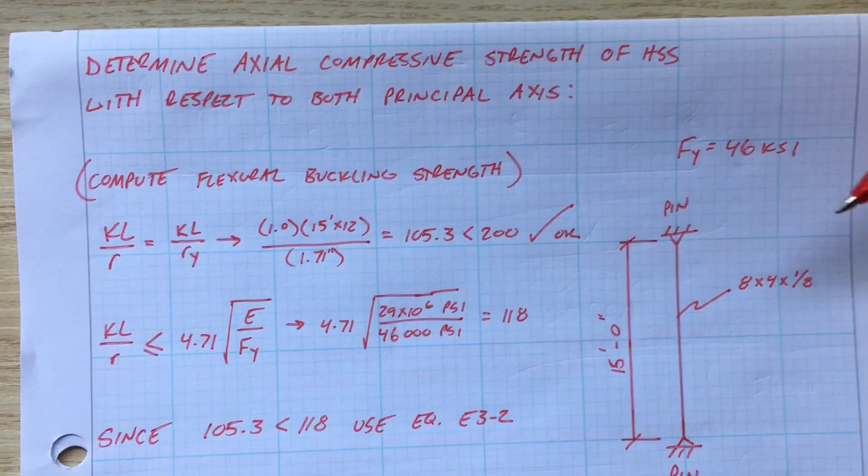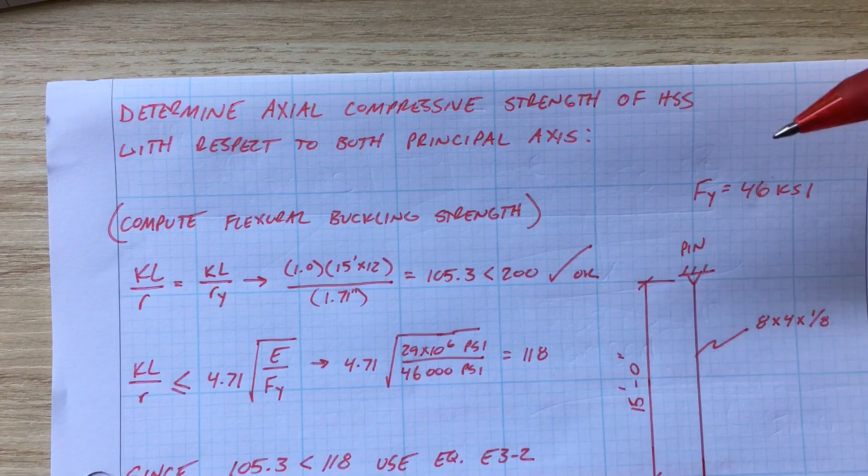So I have not actually supplied a load on this column. Today we're going to compute and determine the axial compressive strength of the HSS with respect to both principal axes, because we have two different cases here: compression about the x-axis, so this way, and compression about the y-axis, so that way. And because its geometry is different in both axes, we need to figure out if that's going to affect our strength.

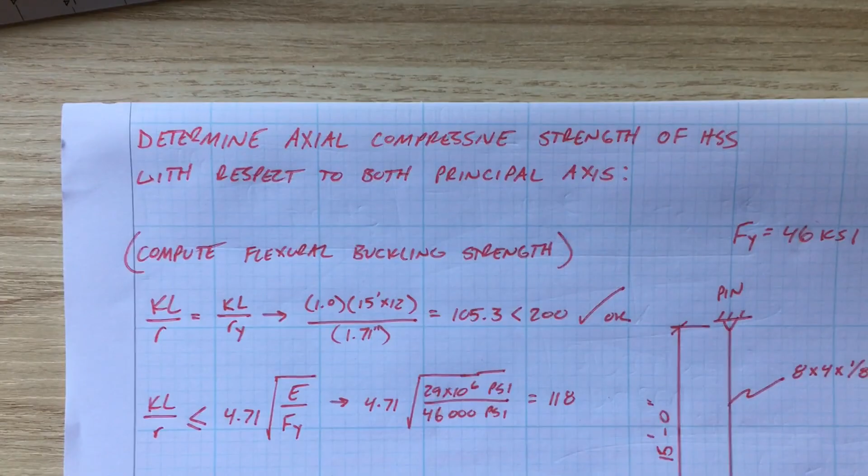So let's get into it. As always, since we're working with steel, you're gonna need your steel manual, the AISC steel manual. I'm going to be working with the 14th edition. The 15th edition is out, it's been out for a little while now, but everything should be just about the same, so you should be able to follow along pretty easily with that one if you have it, so don't fear.

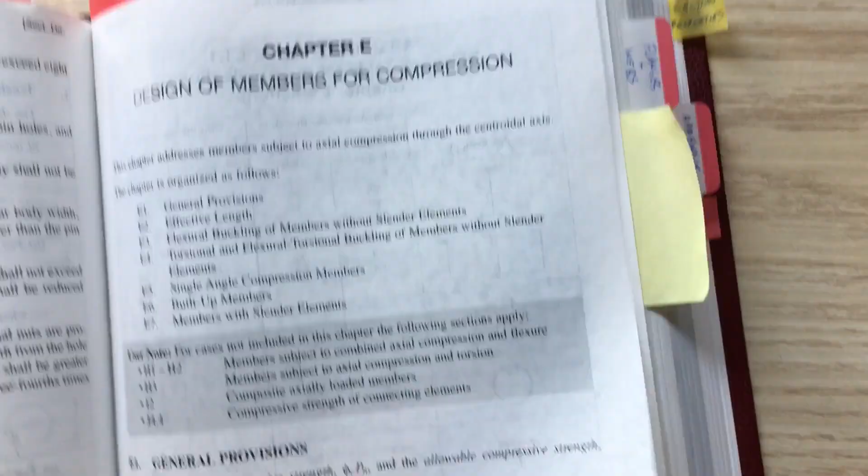All right, so what we want to do first is compute the flexural buckling strength. If you go to Chapter E in your design manual, that's the design of members for compression, and that's what we're doing. So we'll flip to the next page, and this gives us our table, and basically it helps you break down what your section of your column looks like.

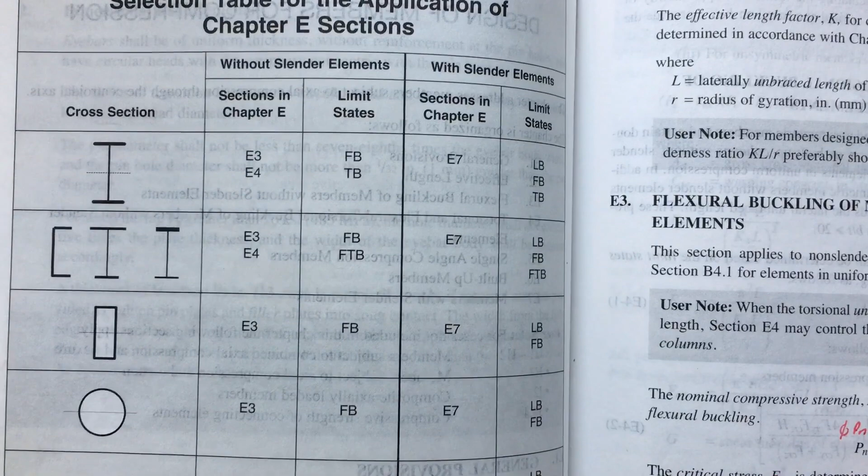And we have this one, a rectangular HSS member, and it gives you a little cheat sheet that tells you what's going to be the limit states. The limit state is the effect that happens that controls the strength of the column, and that's based on the geometry of your column and the effects that happen. That's been found through testing over years and years in laboratories to see what happens with these different types of geometries under different loading configurations.

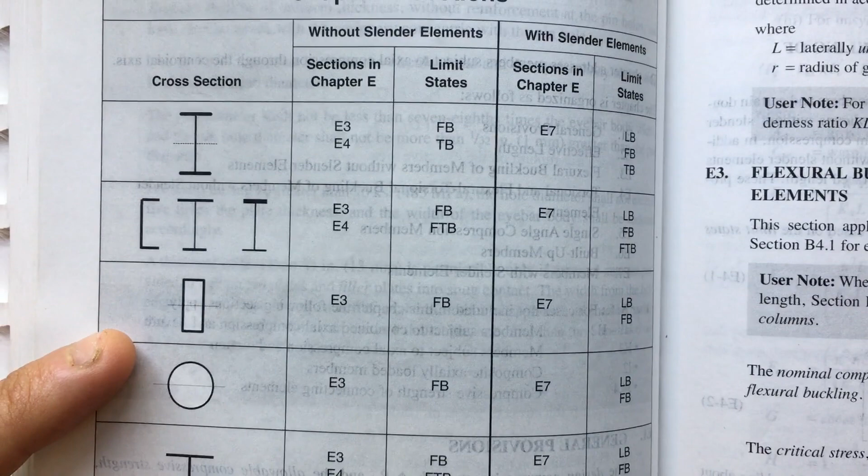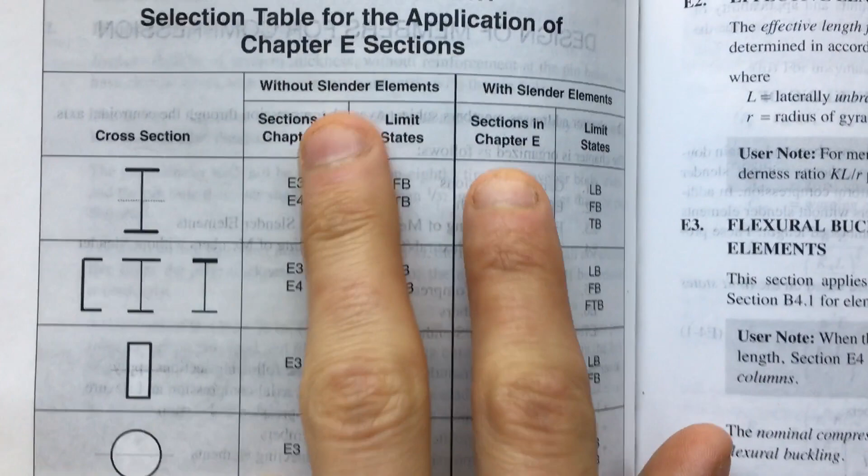But we won't get into that, they've done all that for years and have tabulated it and found the results. So you have two sections here: without slender elements and with slender elements. We're going to jump back to that, we will need to figure out and check to see if our section is slender, but first let's just assume it's not slender.

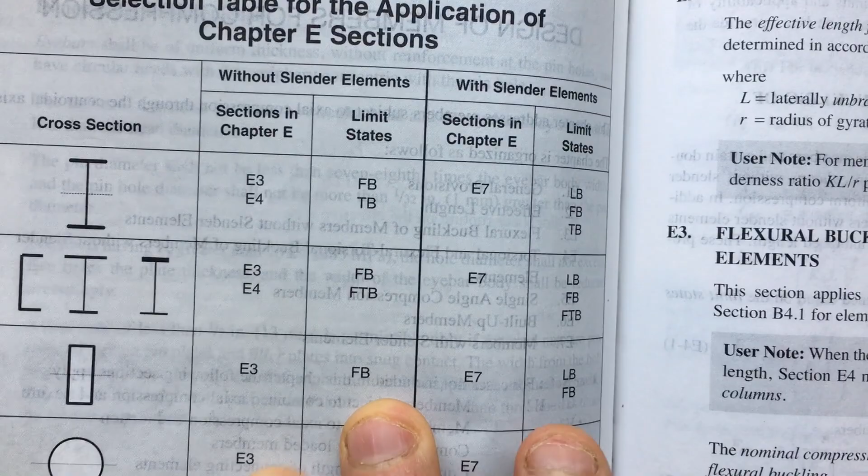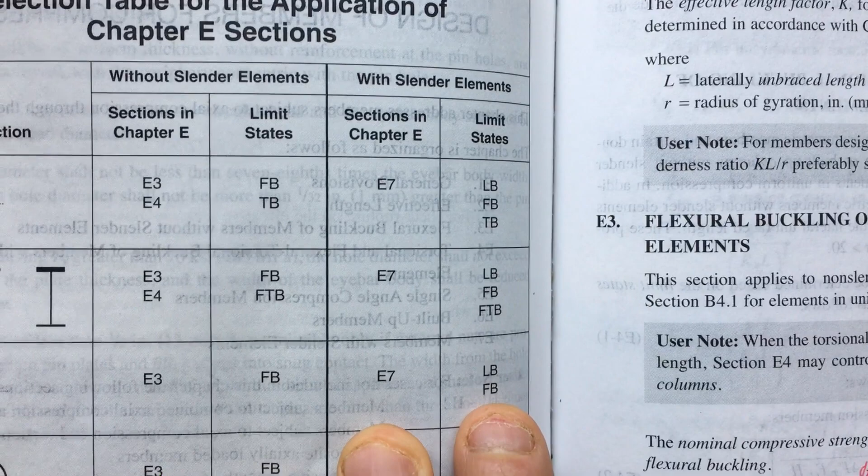So without slender elements, if you look at the limit states in both cases, without slender elements you just have to look up flexural buckling, and with slender elements you have two limit states: flexural buckling and local buckling, FB and LB. So you have FB in both cases regardless. Let's find FB first, since it doesn't really matter if it's slender or not because it's required in both.

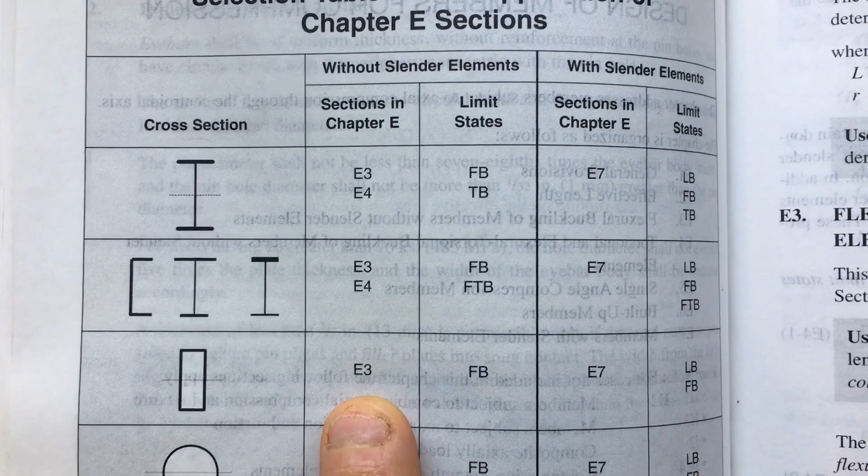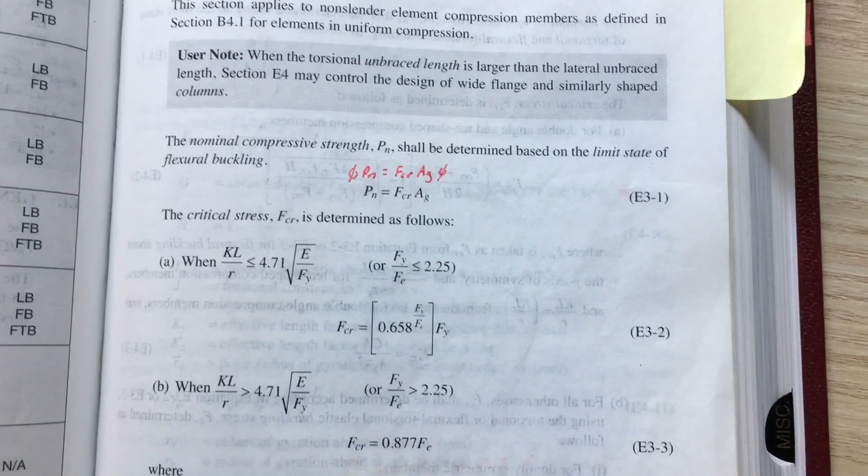And what that does nicely is it tells you what section it's in. So FB, Section E3 within Chapter E. Well this is Chapter E, we'll go to E3, and here we are: Flexural Buckling of Members Without Slender Elements. This runs down and gives you all of your equations that are required, so that's where all of this is located. I'm going to jump back to the page that I have, but that's where all of my equations are coming from. So first we need to start off with KL over R.

And actually, sorry, we're going to flip back.

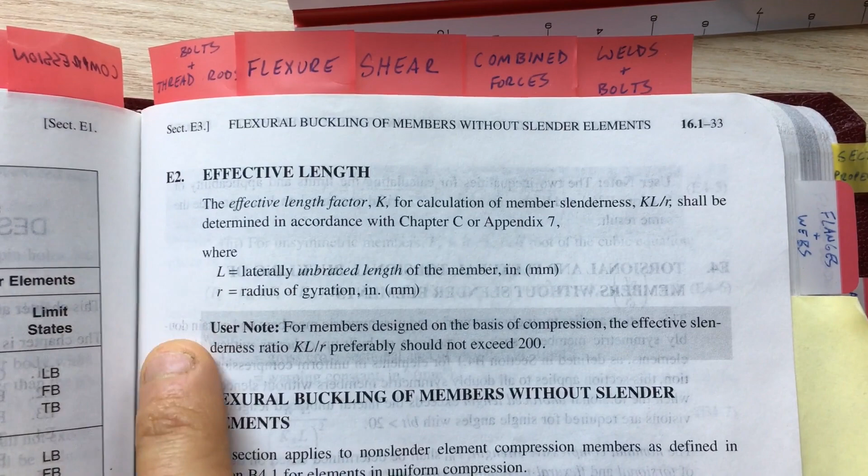That's talking about the effective length section, E2. So you need your K, which is your effective length factor, and you need your L, which is your lateral unbraced length of the member, and then R is your radius of gyration.

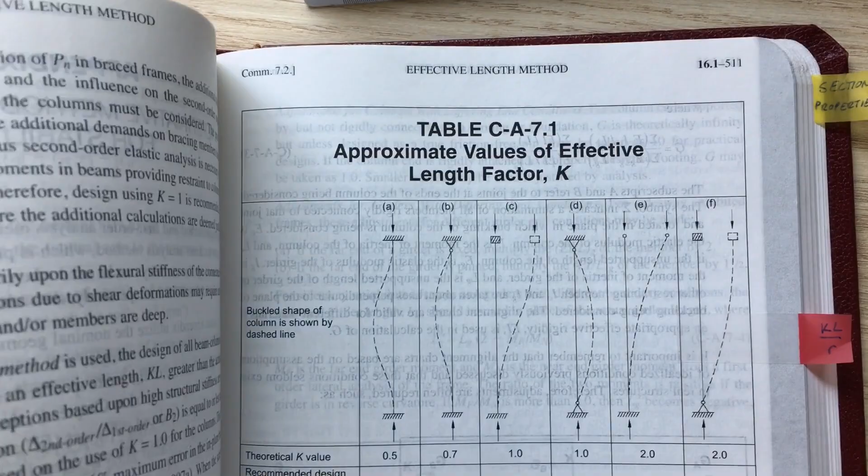If we go to another tabbed section that I have, Appendix 7, for all you future ASCE or AISC steel manual tips and tricks you've seen in my last video, this would be another section of mine. It gives you all the different configurations of what a column is and how it's connected and how it's braced.

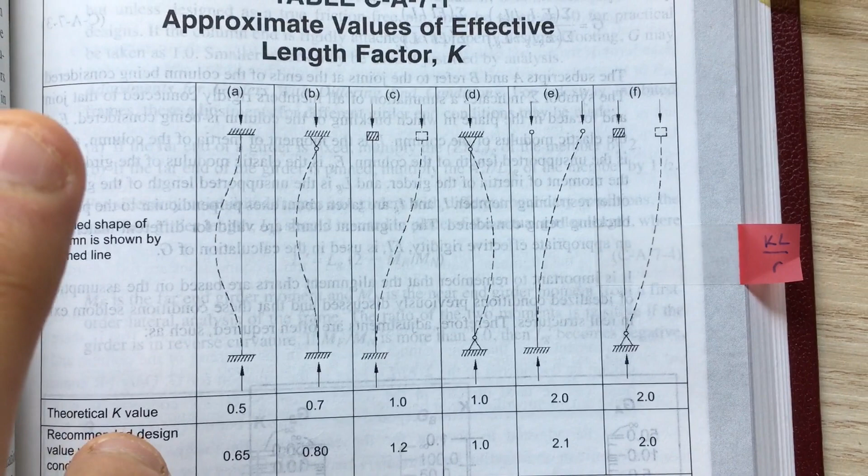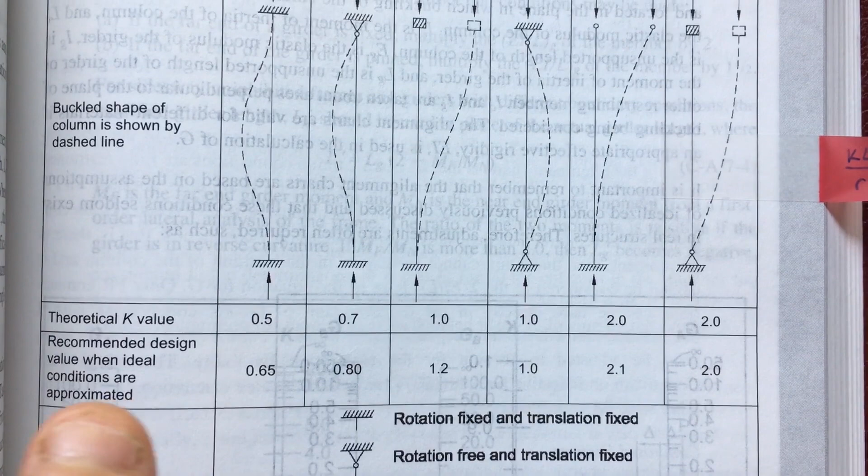It's pretty straightforward in this example. We are just pin to pin, top and bottom, and that means our theoretical K value is 1.0. And what's nice and what we use in typical engineering in the professional world is the recommended design value when ideal conditions are approximated, so it throws a little factor of safety on there. As you can see, it's bumped up slightly.

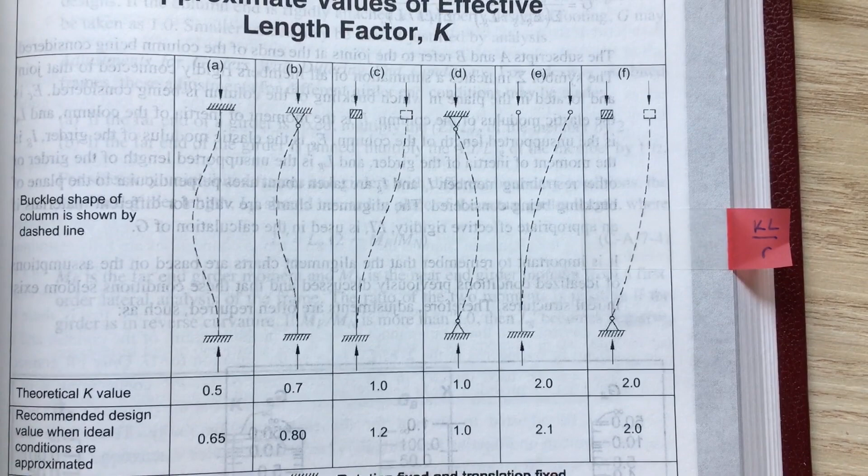What that does is give you a slightly conservative number when you're designing your buildings, just in case everything isn't according to plan. There are other factors taken into account, but I like to think it also accounts for if that beam isn't perfectly set or plumb when constructed and you get some accidental eccentricities in there. This helps account for that so your structure is still safe.

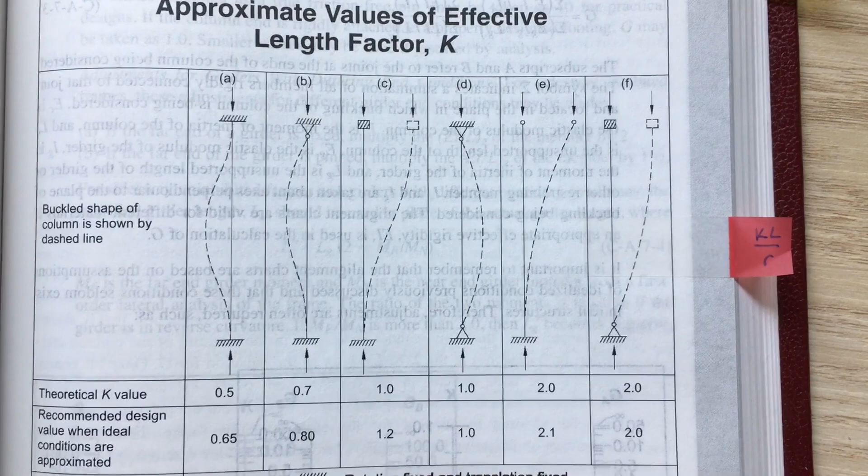But for us today, it's easy. It's section or option D, pinned. So our K is 1.0.

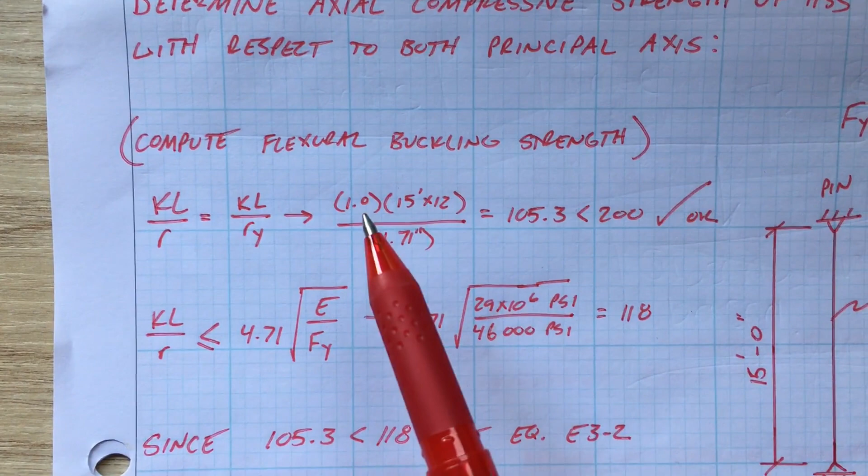So KL over R, we have our K is 1.0. L, if we go over, is 15 feet, that's top to bottom of our column. So 15 feet, we're going to convert that to inches by multiplying by 12.

And then R, we want our least R in this case. What we do is... hang on one second, throw a sticky note in here. This is why, as you can see, we have everything tabbed up the way that I do. Okay, so we need to go back to our section properties.

Let's see how quickly I can do it on the spot. Usually I have it tabbed up for you guys. 8 by 4 by 1/8, and this is in our table 1-11 of all our section properties, and radius of gyration is there.

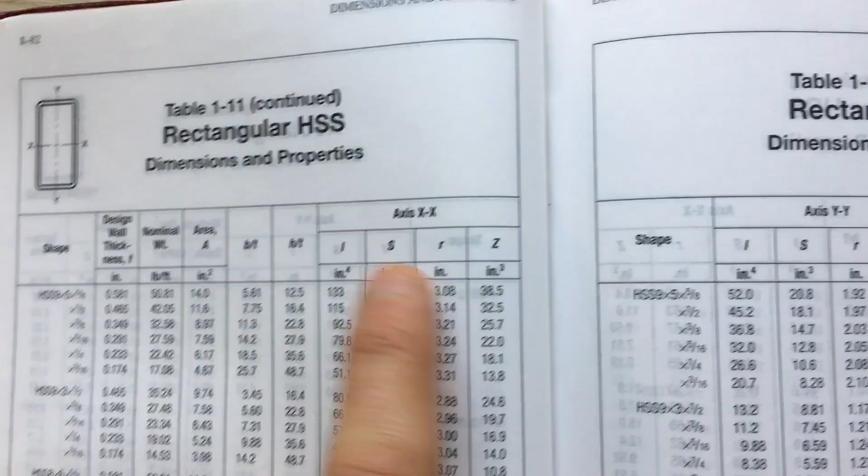So what we're going to need to do is check for both the X and Y direction because it's different. For X, 8 by 4 by 1/8 gives 2.92 for RX. And for RY, it's 1.71. So we're going to use R equals 1.71, that's the least.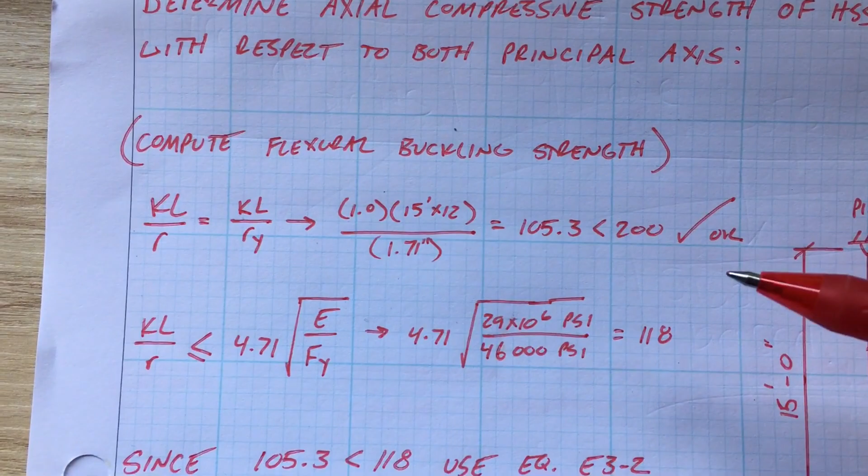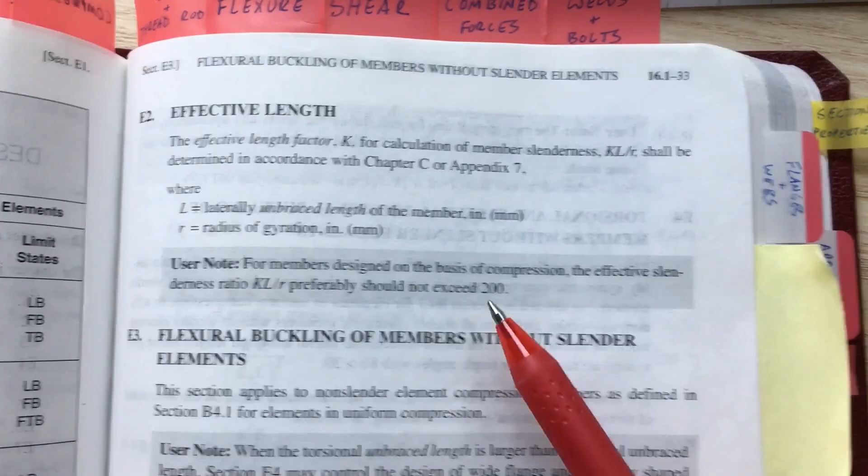Okay, so now we have everything we need. KL over R comes out to equaling 105.3, which is less than 200. You always want to keep it under 200, and that's noted right here in the user's note. It says preferably, but I've never seen an instance where we've allowed something to exceed 200. So that's a first little check, and that's okay.

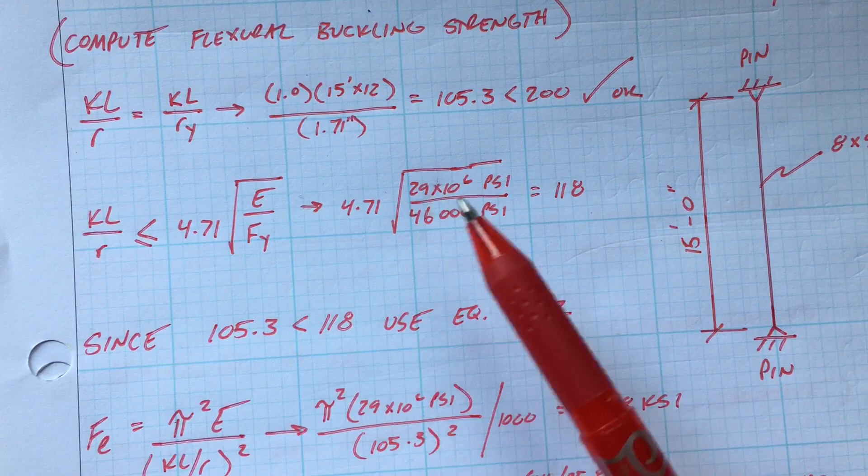So we can move on. Next, we need to check that KL over R is less than or equal to this equation here, and again that's in section E3 for chapter E. We find that E is just 29 times 10 to the 6 PSI, and FY is 46 KSI for rectangular members, so we convert that to PSI. You want to watch your units here, making sure they're both equal. You can use KSI for both or PSI for both, doesn't matter, as long as they're the same. That comes out to equaling 118.

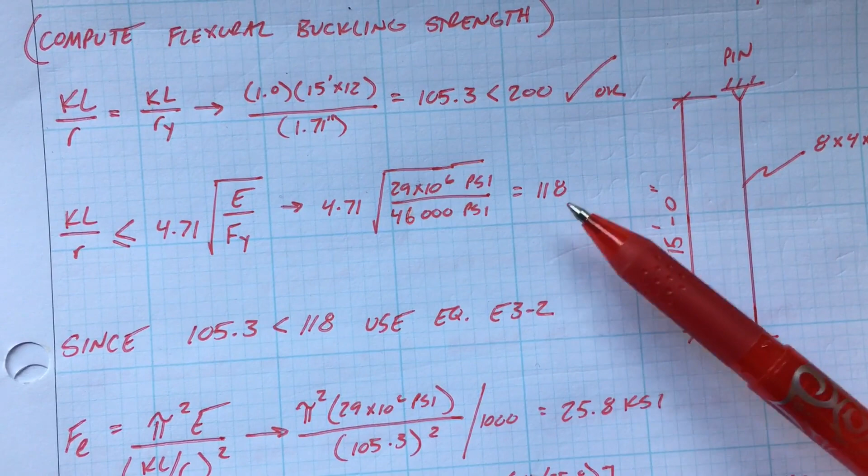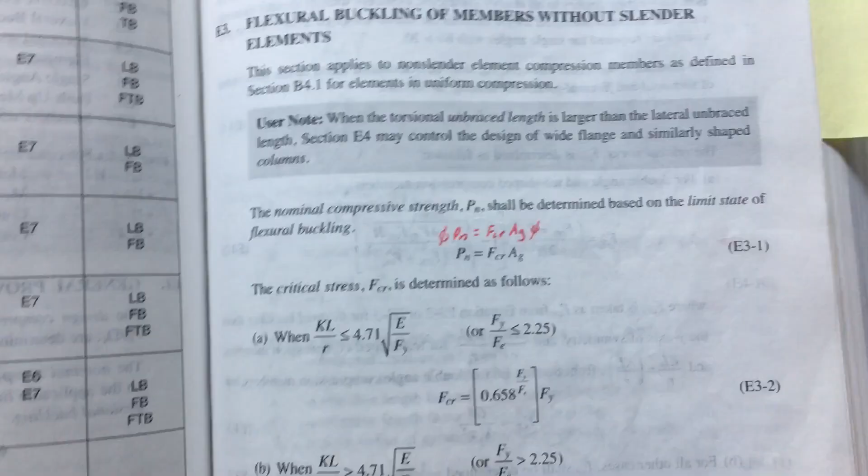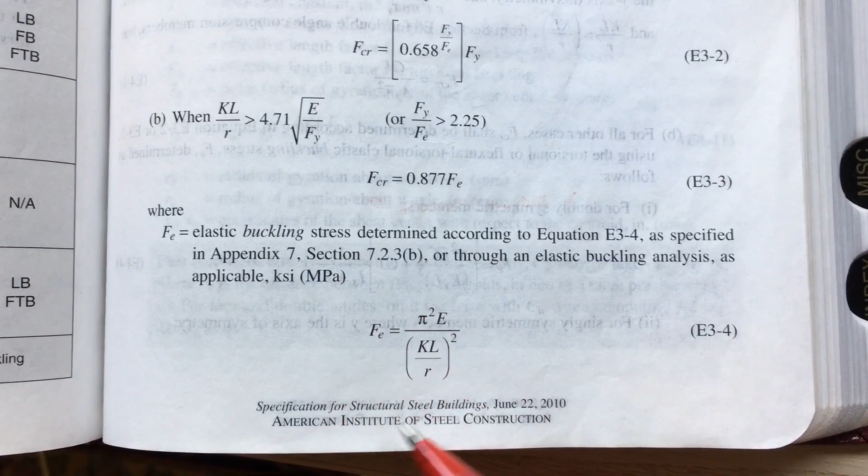Now, since KL over R equals 105 and is less than 118, we get to use equation E3-2. We'll come back to the book, and equation numbers are marked over here. So when this is less than, we get to use F critical, FCR, which equals this equation. But within the equation there's also FE, which we don't know. If we scoot to the bottom, FE is this equation right here. So we find FE first before we can find FCR. I know it's a bit of a process, but we'll get through it.

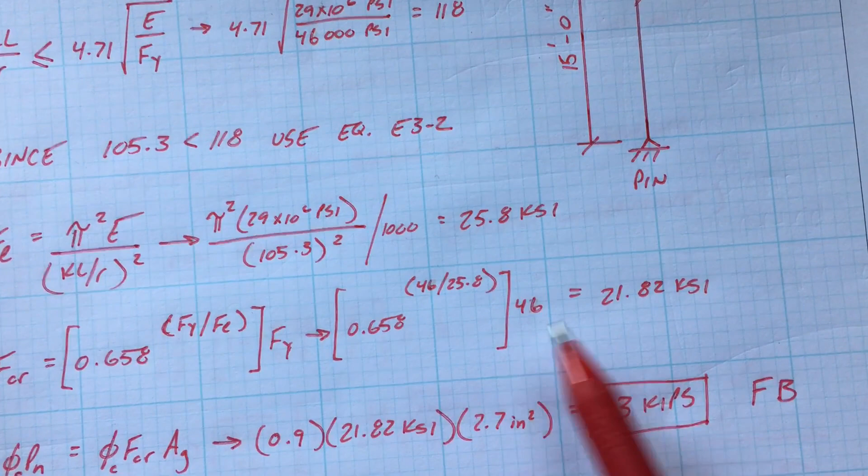So here's our equation, plug everything in, we have all of our knowns. Make sure if you're using PSI, you divide by 1,000 at the end; if you're using KSI, it'll just come out as KSI, that's why I have that there. That equals 25.8 KSI, that's FE. And then FCR is now this equation, and we have everything so we can plug it in. That gets us FCR is 21.82 KSI.

And your compressive strength for flexural buckling is this equation here. Phi PN, I'm assuming LRFD, equals Phi FCR times AG, area gross of the member. Phi for compression is 0.9. So 0.9 times 21.82, that's our FCR, times AG, which you can pull from the material properties, if I can flip to it.

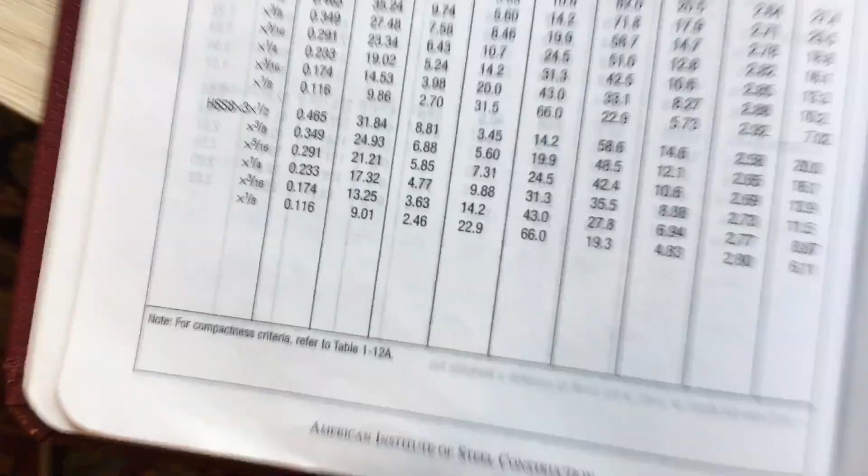So you see area in inches squared, 2.7. Right. Oh, I don't even see my... right there. Okay, we're having technical difficulties here. Hang on, I didn't mark everything accordingly.

Okay, so we have everything, plug all that in. It gets us 53 kips. Remember, watch your units, KSI and inches squared, so kips per inch squared times number of inches squared just gives you kips. 53 kips, that's your flexural buckling strength, factored for LRFD.

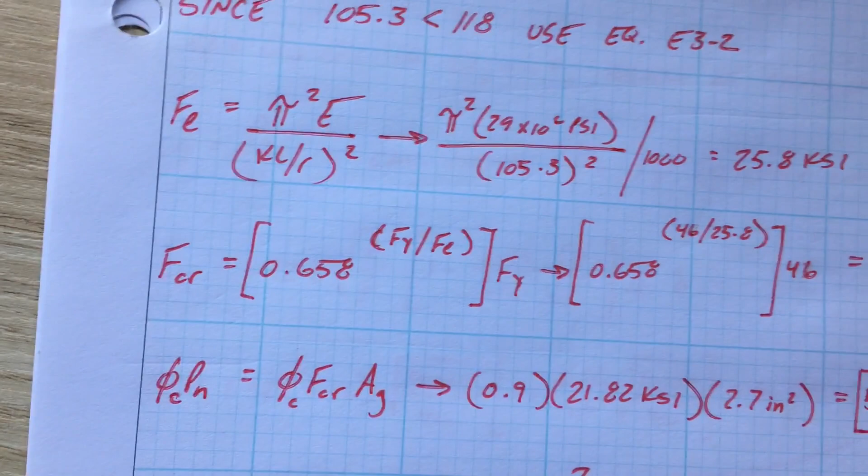So that's the first part. Second part, though, we need to confirm whether our member is slender or not. So is the member slender? What we're going to do is take B over T. We need to find B over T, and we need to find H over T. They're the same thing, just with respect to both principal axes.

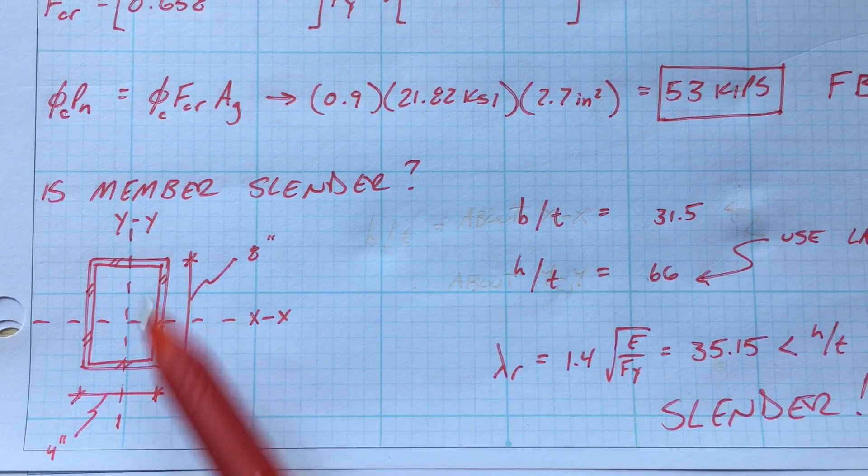Because we said we wanted to check both principal axes for the strength. So one of them is 31.5 and the other one is 66, and you want to use the larger in this case for what's coming next. You can do this by hand, but if you go to the properties table, in table 1-11, they actually have B over T and H over T right here. So just pull them right from there, makes your life a lot easier.

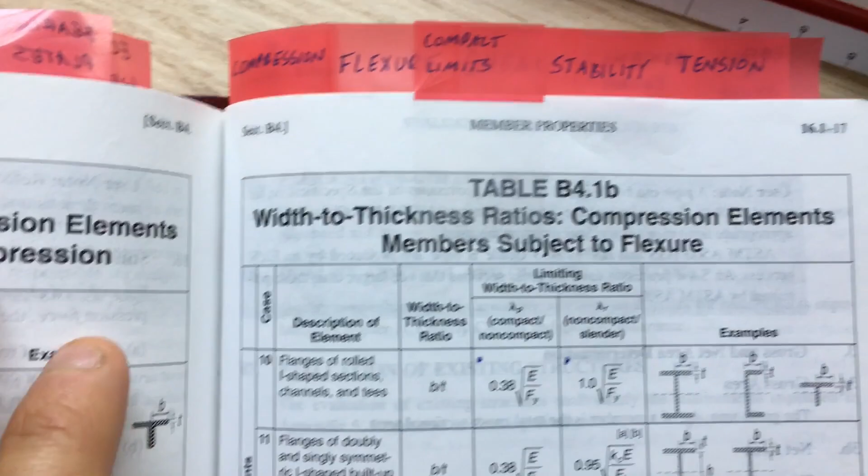What you need to do next—sorry about the camera working, I'm moving a lot—you need to go to table B4.1, A and B. This is your compact limits, and in case you want a page number, there it is. You have two tables here: width to thickness ratios, compression elements, that's what we have. Members subject to axial compression, that's what we're looking at.

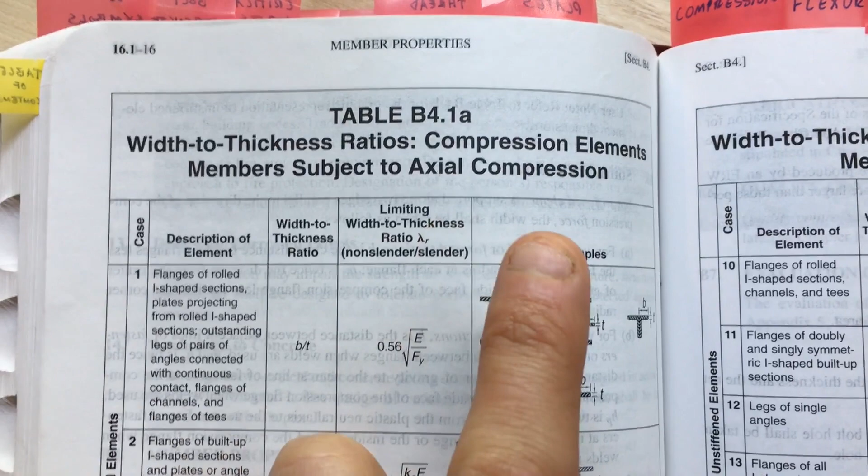The other table is members subject to flexure, so compression elements subject to flexure—we don't have that in this case. We're looking for a compressive strength, so we just want this table. If you go down all of these, you run into option 6, which is going to be an HSS, you can tell by the shape.

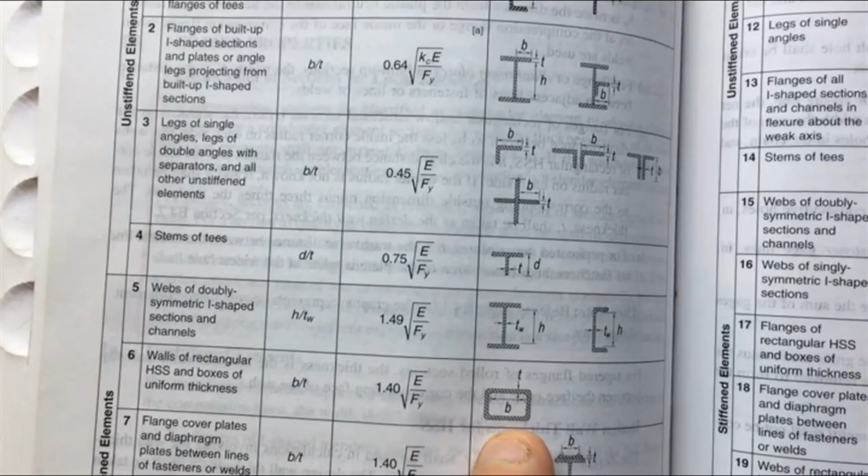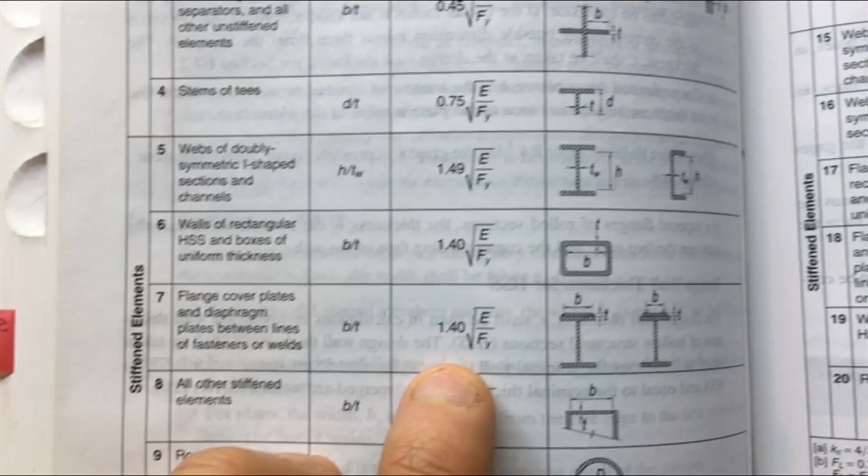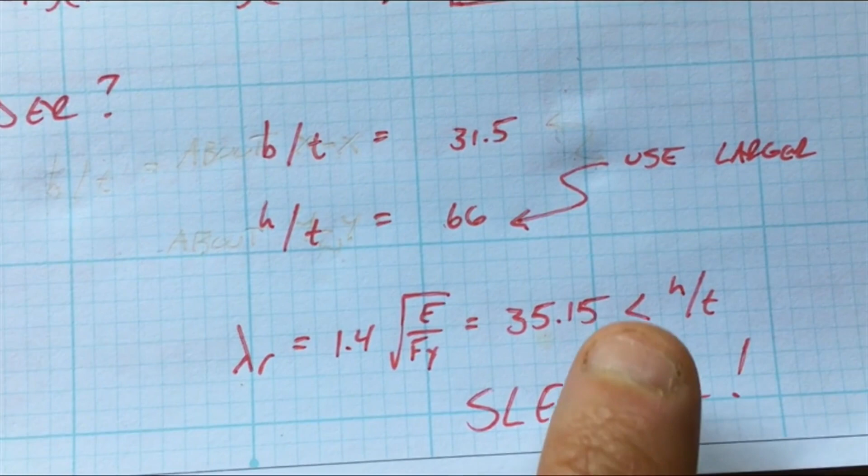So you need to first find B over T for both directions, and that we've done—B over T and H over T—and again, those are both in the properties section. Right there, B over T, H over T. You need to compare them to your lambda R, and for our case that's 1.4 square root E over Fy. We solve for that, gets you 35.15, which is less than, and you want to use the larger value, so less than H over T, which is 66.

So that means we have a slender element. So we have to go find our local buckling capacity. Since H over T is greater than—like I said, the larger dimension element is slender—the local buckling strength must be computed.

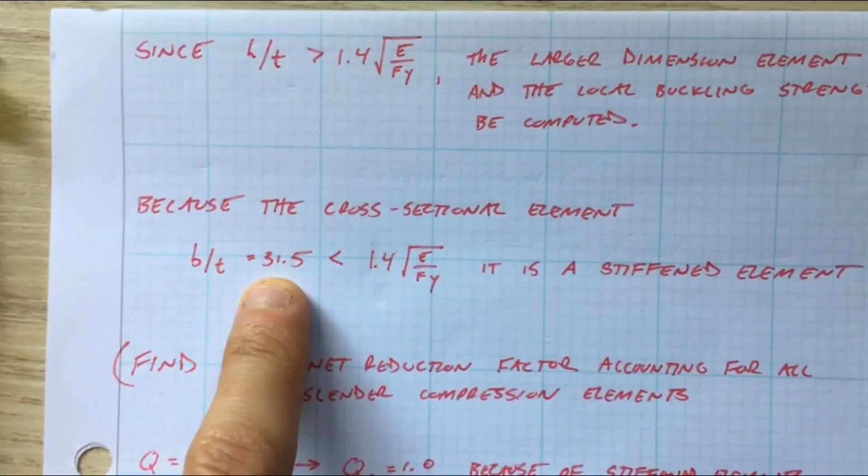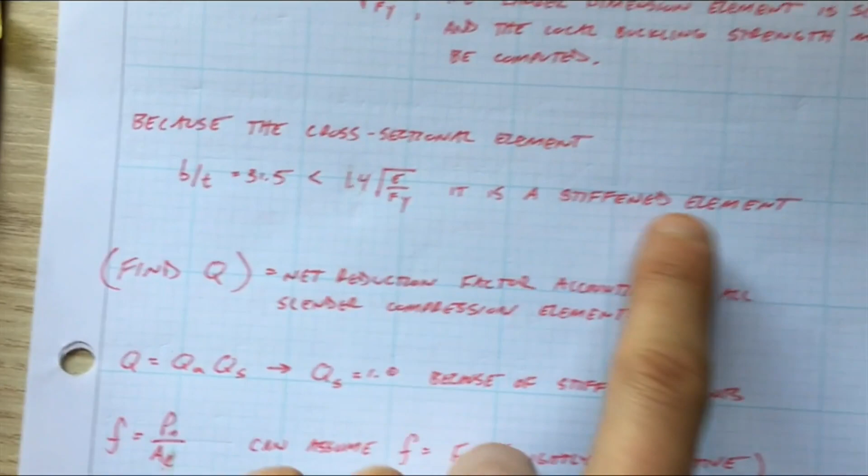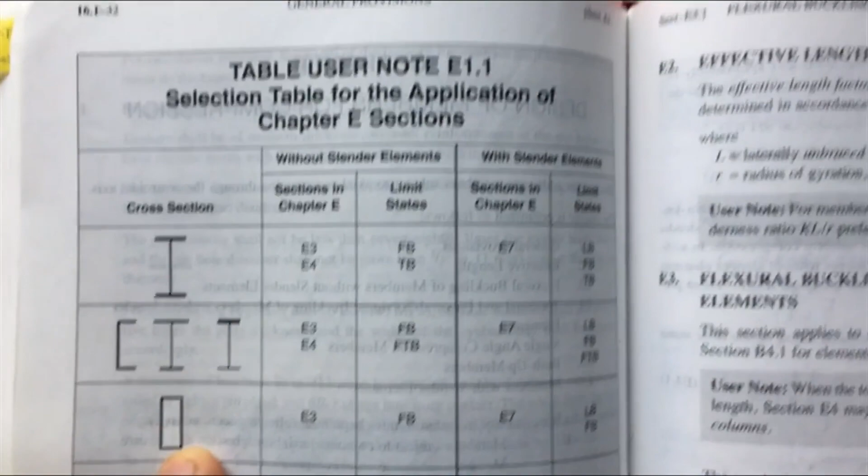Now, because the cross-sectional element B over T equaled 31.5, and the other one equaled 66, 31.5 is less than your lambda R. So that is a stiffened element, and that'll come in handy because now we need to find Q. What Q is—if we go back to our compression section, let's see, where do I want to go here—back here to our cheat table, again, 16.132.

Now we have slender elements, so now we need to go to chapter E7, because chapter E3 was flexural buckling, but now we need LB, which is local buckling, and that's in chapter E7. So we flip to E7, and we come up to members with slender elements.

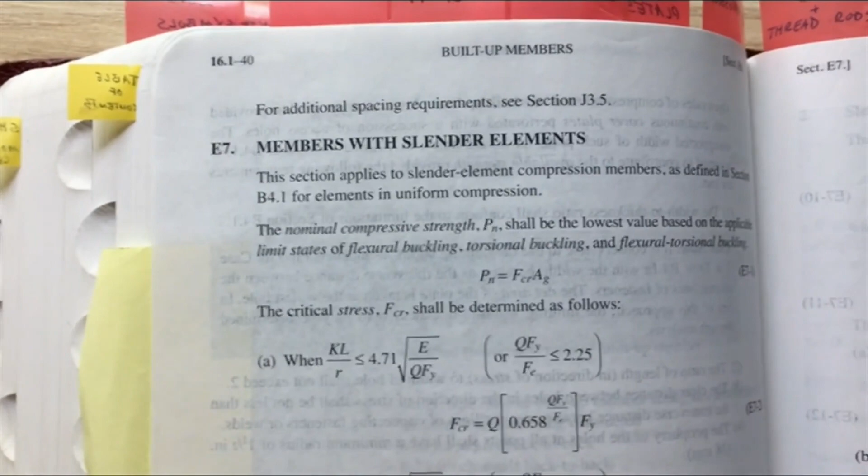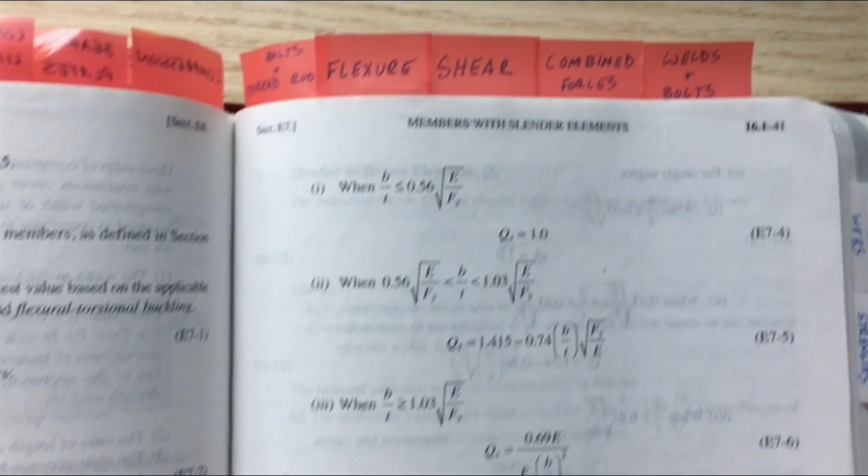What this all breaks down into is needing to find Q, and we know that Q equals QS times QA, and it gives you all of the different equations to find your QS and QA. Now we need to go to 16.143, because we want for flanges of square and rectangular slender element sections of uniform thickness, where B over T is greater than 1.4 root E over F, so we want this.

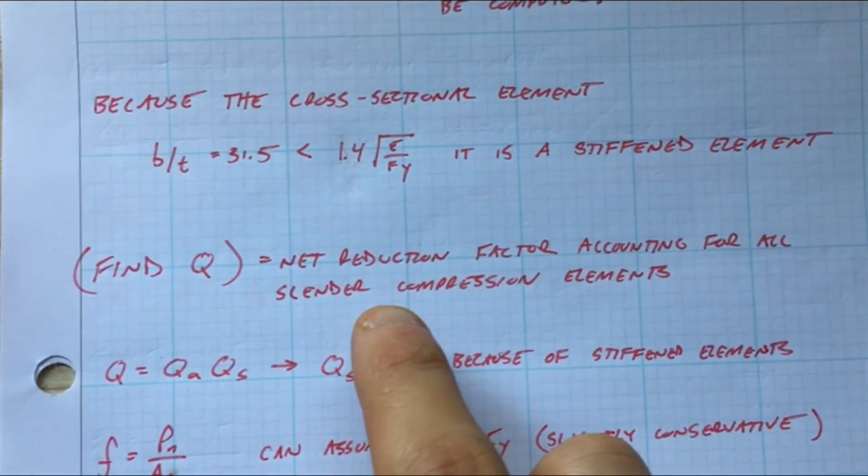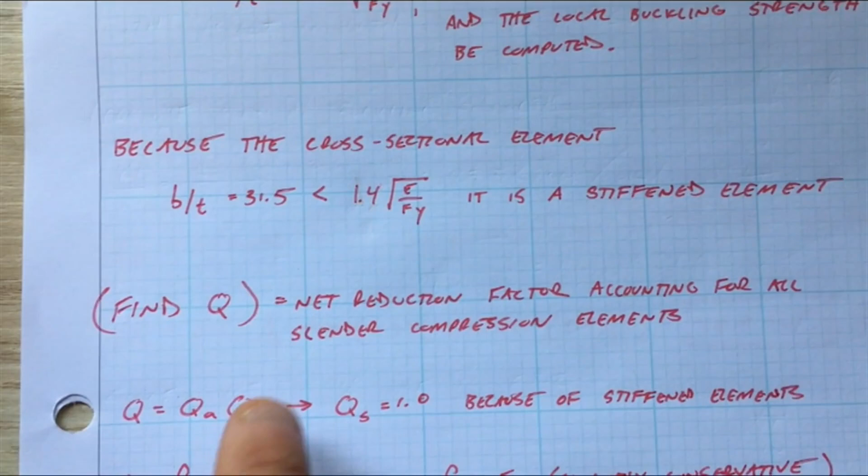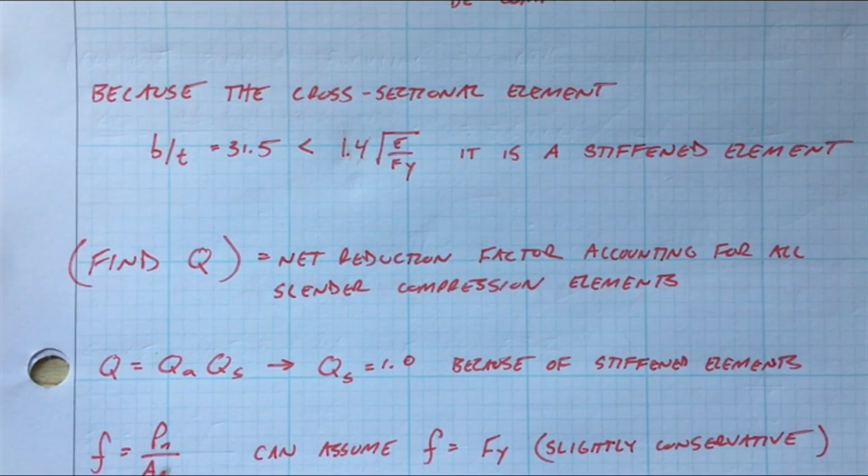Now we need to find Q, and Q equals QA times QS. We know that QS equals 1.0 because we have stiffened elements in the opposite direction. If both your numbers for B over T in both directions were greater than 1.4 E over Fy, then we would need to find QA and QS. If both were less than this number, then we wouldn't have a slender element, meaning both QA and QS would equal 1, so Q would equal 1 and there'd be no reduction—local buckling would equal the same strength as flexural buckling. That's why we don't need to find it if we didn't have a slender element. But we do, and we have a stiffened element within it in one direction, so QS equals 1. All we have to do is find QA.

Now, if you look back in this section, again, everything that I have written down is from this section.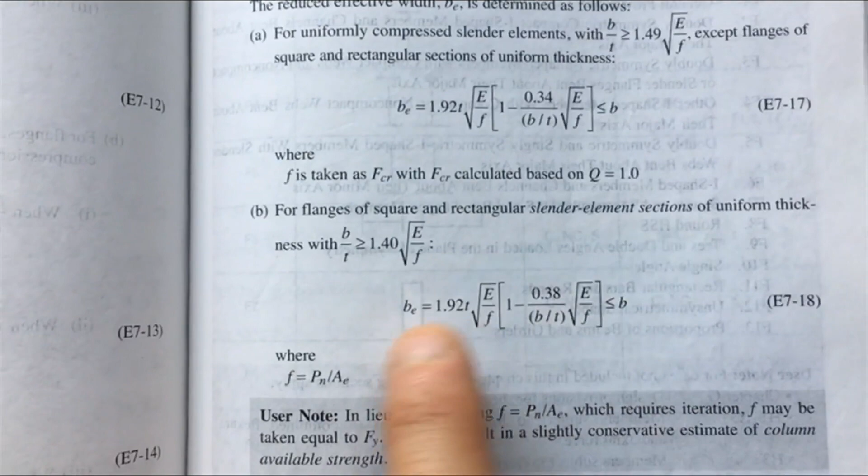16.1-43, we talk about this. We need to find this equation for B effective, because we have everything in this equation except for F. F equals Pn over AE. But in the note, it says instead of finding this, because these are unknowns, F may be taken equal to Fy, which we know is 46.

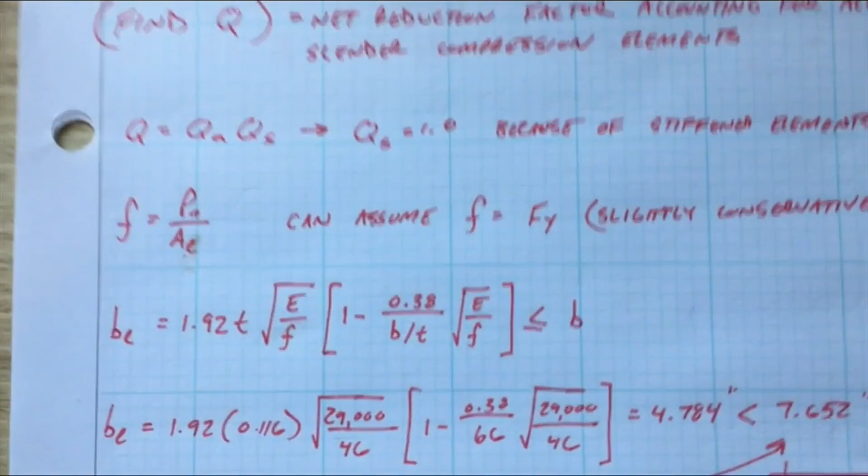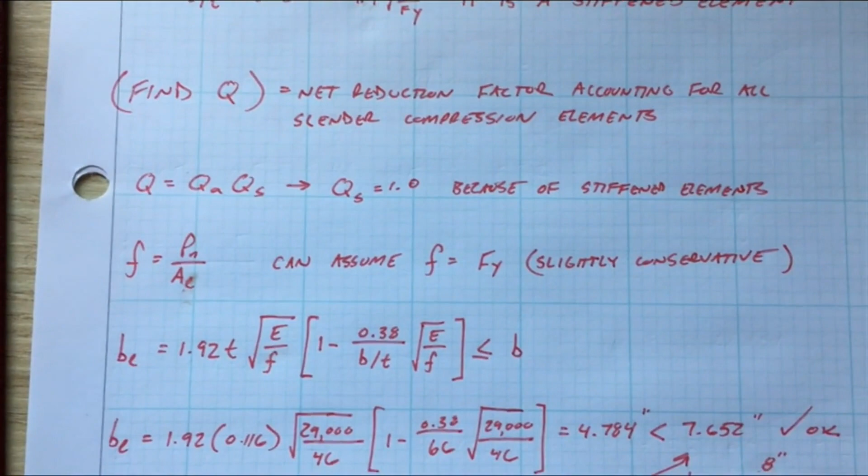So we're going to do this. It's slightly conservative. Not that we want everything to be super conservative in engineering, but that helps us out a little bit. If we needed to come back and sharpen the pencil later, because we really need to push the design to get it to work out, this is a location we can come back and try to make things work differently.

But for right now, we'll just assume we'll be able to take F equals Fy. Plug everything into this BE equation, and it needs to be less than or equal to B. T is your thickness of your member, B over T was in the section property, E you have, F is just Fy, so plug that all in.

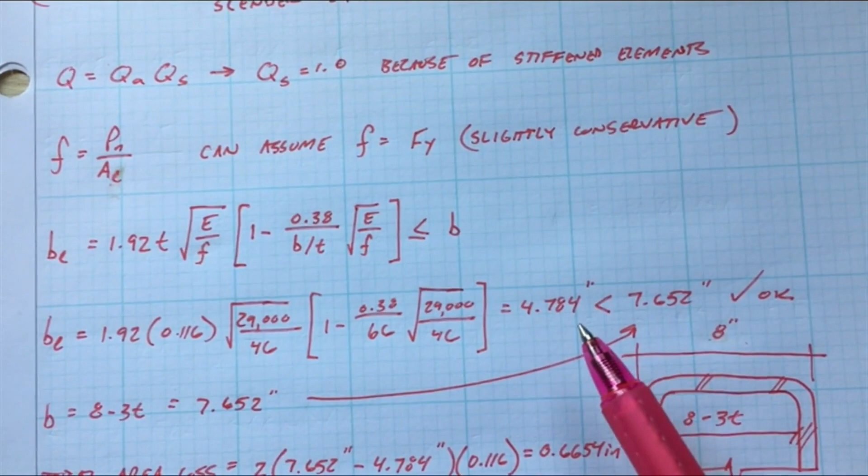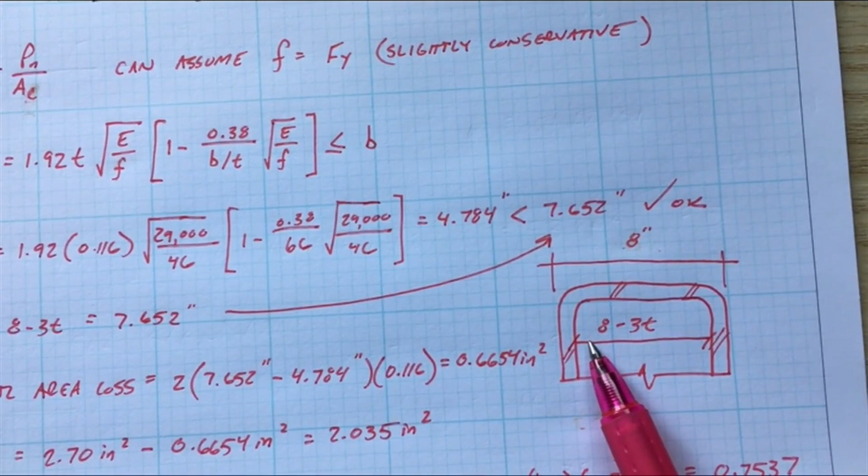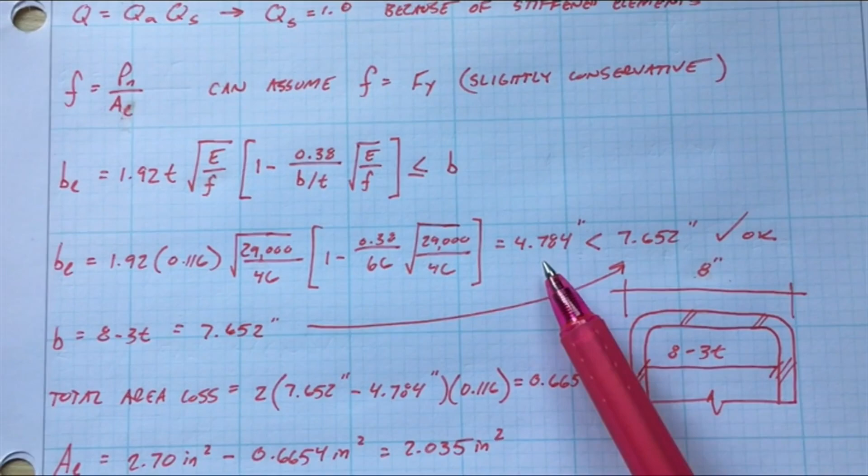That gets you 4.784 inches, which is less than B. Now B needs to be taken not just as base width, which is 8 inches - it actually needs to be defined as B minus your radii, which breaks down to B minus 3T. There's more literature on this in the book that I suggest reading, but for now, that's this dimension here, which comes out to 7.65 inches, greater than your BE. So you know you're good, because that's B - that's satisfied, so we're okay there.

Now QA is just equal to AE, area effective, over area gross, and that gets you that. Units will cancel here, so make sure you're tracking those units. What this effectively is - since QS is just 1, Q equals QA times QS - which equals that. That is your reduction in strength based on local buckling instead of flexural buckling.

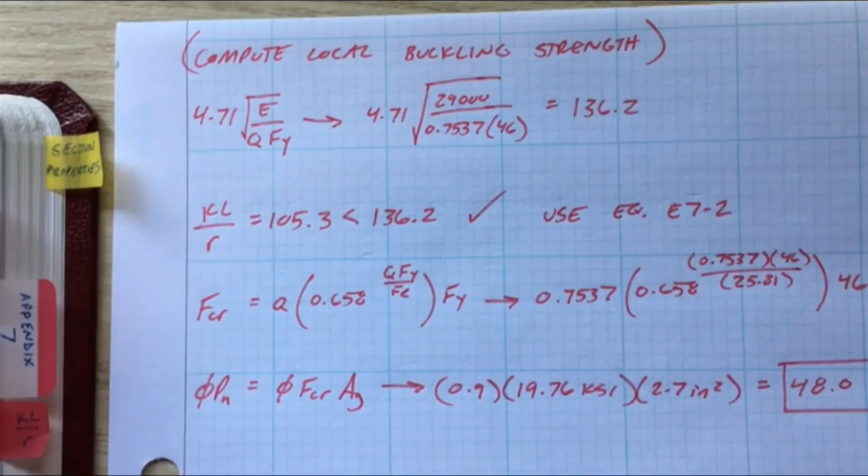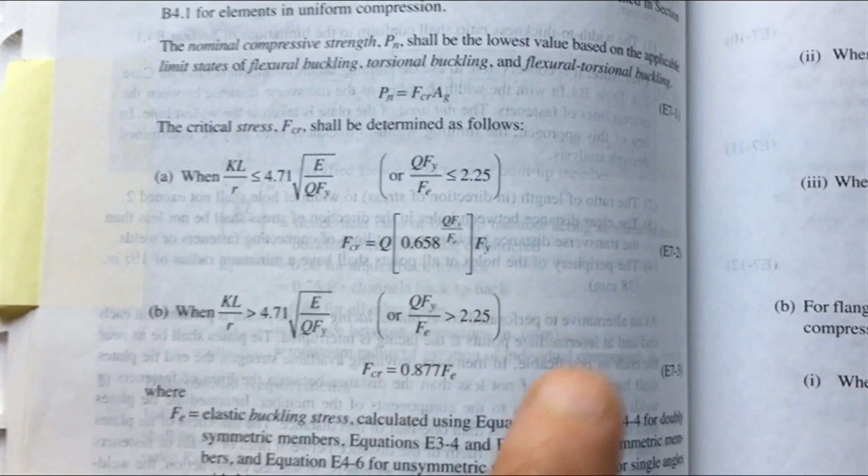So we'll take that, and now we need to compute our local buckling strength. We just pop back to the beginning of chapter E7, and now you just have to run through here. We need to find FCR, your critical stress, and FE, your elastic buckling stress, because that's part of the F critical equation. It's the same as the flexural buckling equations, just there's a Q inserted into the equation.

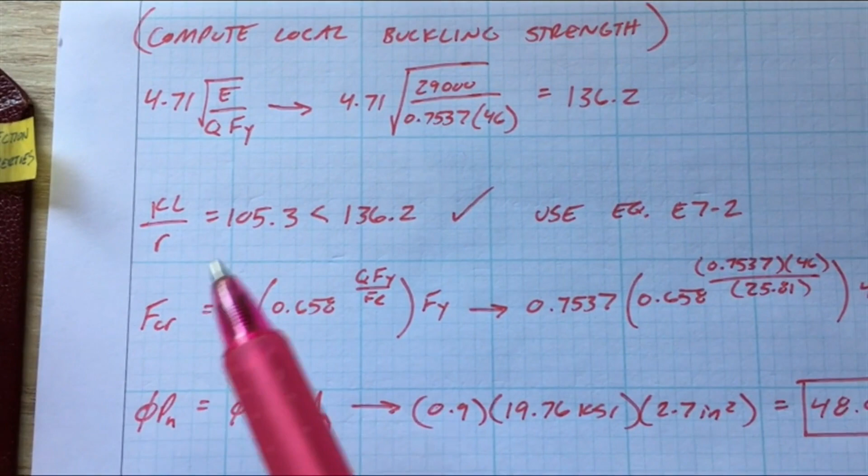And that Q is just a factor, less than 1, so it's just a reduction in strength. So you'll run all these again, and I'm going to show you here so we can keep following along. Compute this with Q, gets you 136. KL over R we already know is 105.3 from previous, which is less than 136, so that's good.

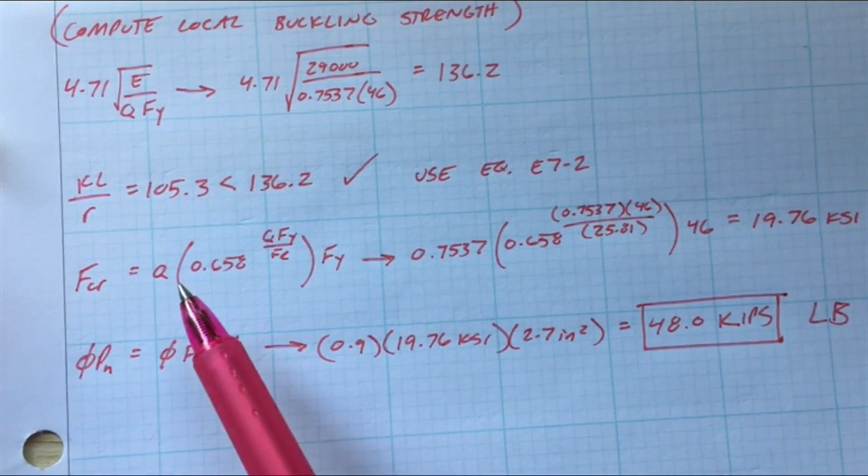So we need to use equation E7-2. It has an FE in it, so we need to go find FE, which we already know from the beginning of the chapter. We've already solved for FE, so we can plug everything into this equation. Plug everything in, gets us 19.76 KSI - it's a stress.

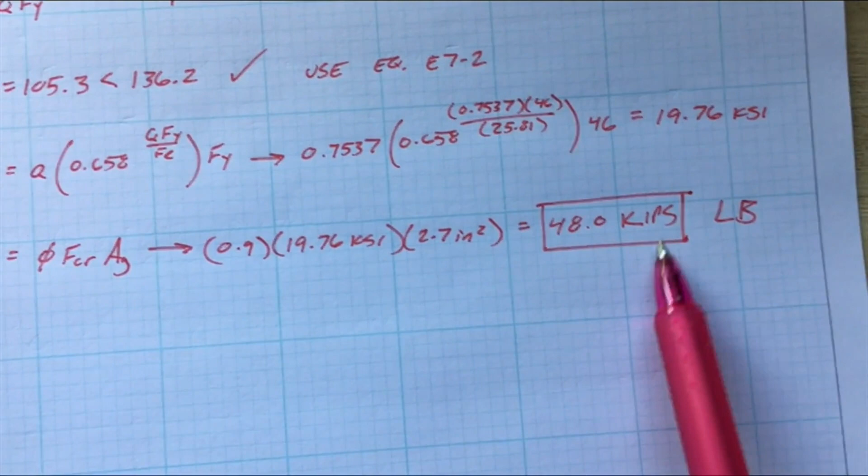Now phi PN equals phi FCR times area gross - it's not area effective, it's area gross, remember that. Plug all that in, gets you 48 kips for local buckling compressive strength. That's LRFD, because we used phi.

So if I go back, when we checked flexural buckling strength it was 53 kips, FB. So for local buckling, now we only have 48 kips. So this controls - that is the compressive strength of our steel HSS column.